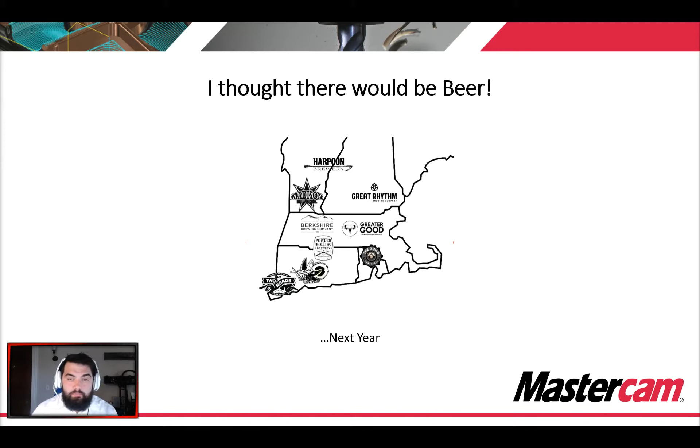A couple of things, some highlights that I'm going to be going over: machining chamfered holes based on just the width and depth of the hole, machining with a customizable multi-segment drill cycle, and the blend toolpath got improved. These are all things I'm going to cover today.

Not in my presentation, but some other highlights of 2021: the UV direction on surfaces can now be changed, which is a game changer for the Flowline toolpath. Also, machining with the new 3+2 automatic roughing toolpath, that's huge. And then machining custom thread forms - those are all things you can see in our other rollouts, other webinars.

Other things about me: I was a machinist before working at MACDAC, running primarily mill turn machines. I've been at MACDAC now 3.5 years.

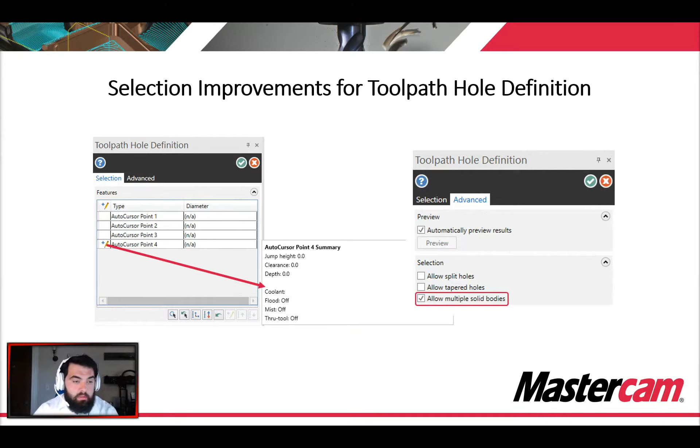So some general mill enhancements: selection improvement for toolpath hole definition. The toolpath hole definition function panel includes two enhancements. On the selection tab, over to the left here, a summary of all the edited change at point parameters are now conveniently displayed on a tooltip in the features list. And then on the advanced tab over to the right, we now have the option to allow multiple solid bodies. So we can recognize same size holes across multiple bodies with a control click onto the different solids.

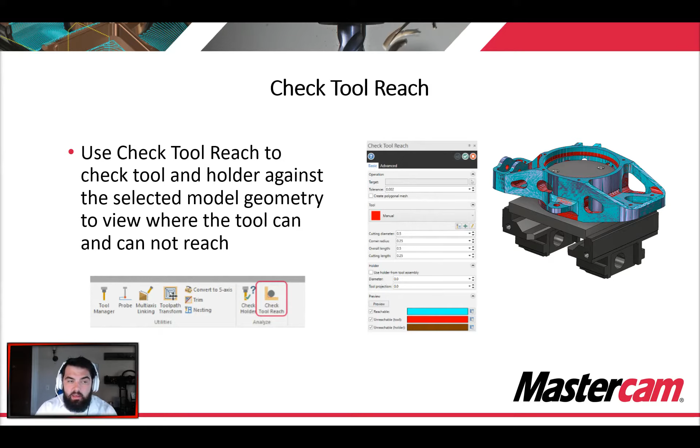Check tool reach - this is a new function as well. You can use check tool reach to check tool and holder against the selected model geometry, and to view where the tool can and can't reach. Here's a quick video on how it works.

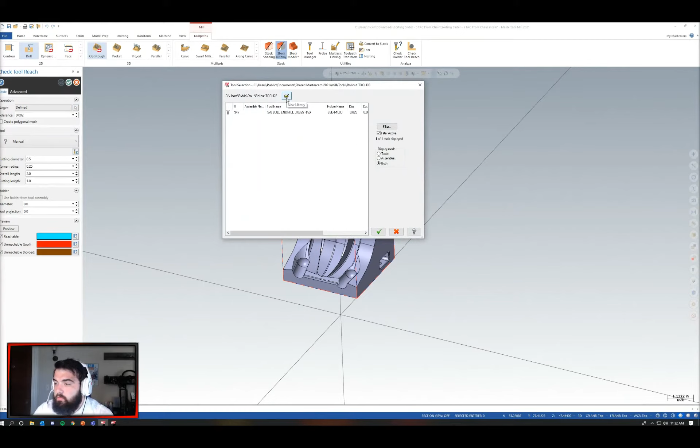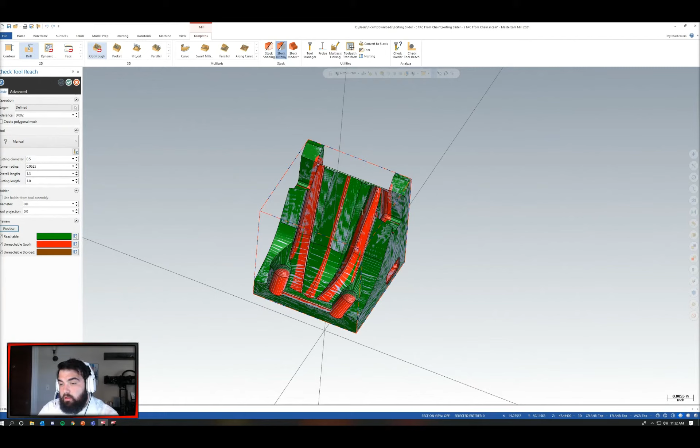So we're going to go to tool reach. Our target is going to be our solid. Now here we can go into our tool library and pick whatever tool we were thinking about using - in this case I have a bull mill. And then we can change our colors however we'd like, so I'll say green is reachable. I preview, and everything green is reachable now with that tool assembly that I gave it from my tool library. Now if I want to, I can also change the cutting diameter, just in case I have to go down a size in a tool or up, however you want to use that.

We've had just the regular check holder for a while, so this goes in the Analyze tab up here.

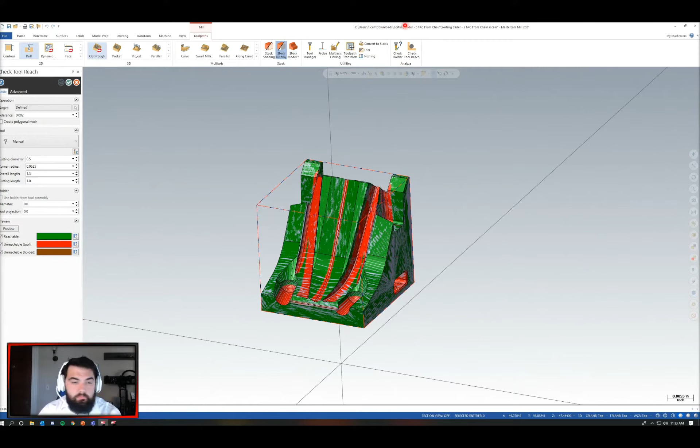So some 2D mill enhancements: skip pockets based on tool diameter or pocket size. This is available in 2D dynamic mill and dynamic OptiRough toolpaths, and there's also an option to now skip all pockets. Smaller than allows you to skip pockets based on your entered tool diameter or the pocket's size. Skip all, pretty self-explanatory - you can skip all the pockets.

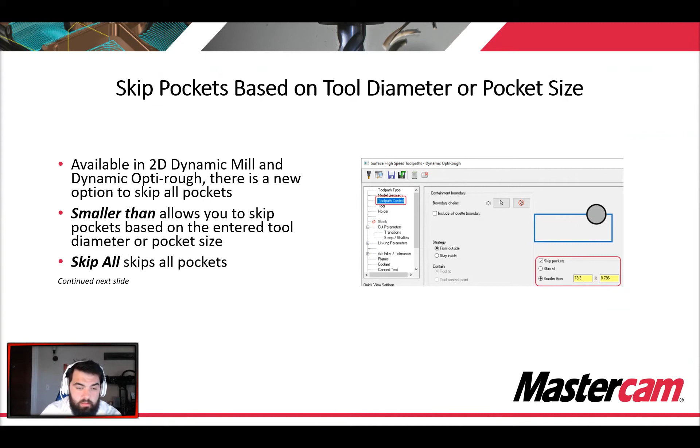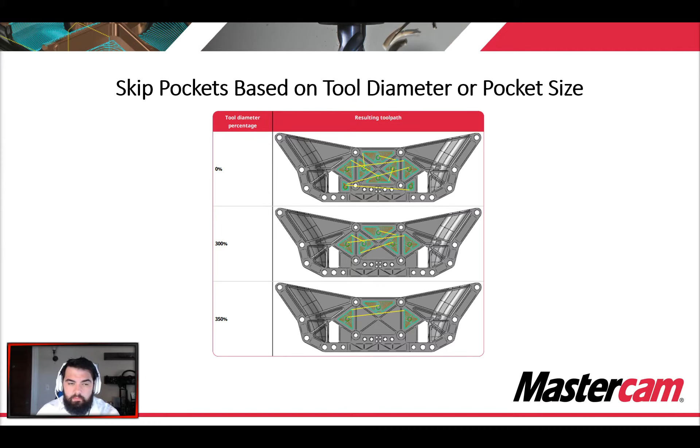This diagram shows the tool diameter percentage and then what the resulting toolpath is going to look like. From top to bottom, the tool diameter being 0, that's going to hit every pocket. At 300%, that's going to skip just that center pocket. And at 350%, it's going to skip all 3 of those center pockets. This is a function you may have seen in some of the multi-axis toolpaths, and now they are trickling down to the 2D and 3D toolpaths as well.

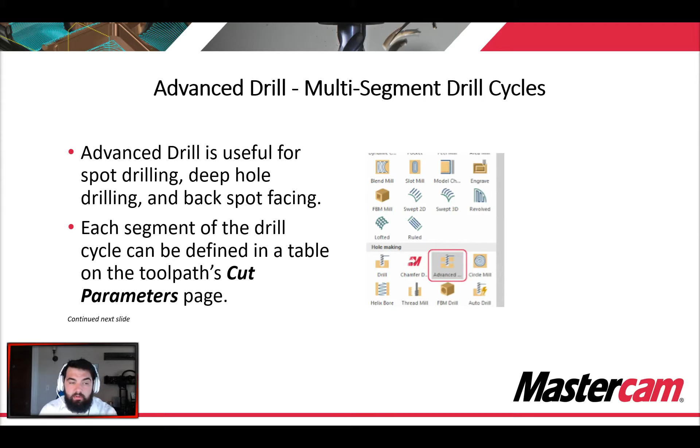Advanced drill is a new drilling toolpath. It's not replacing the regular drill, this is just adding to it. Advanced drill is useful for spot drilling, deep hole drilling, and back spot facing. Each segment of the drill cycle can now be defined in a table on the toolpath cut parameters page.

So what can you do with it? You can customize any or all of the following options. You can define individual pecks within the segment, including retracts to simulate a chip break cycle. You can set the feed rate or choose rapid motion. You can change the spindle speed. You can turn coolant on and off. You can add manual entry comments or code, and then you can also change your tool axis, whether it's 3, 4, or 5 axis output.

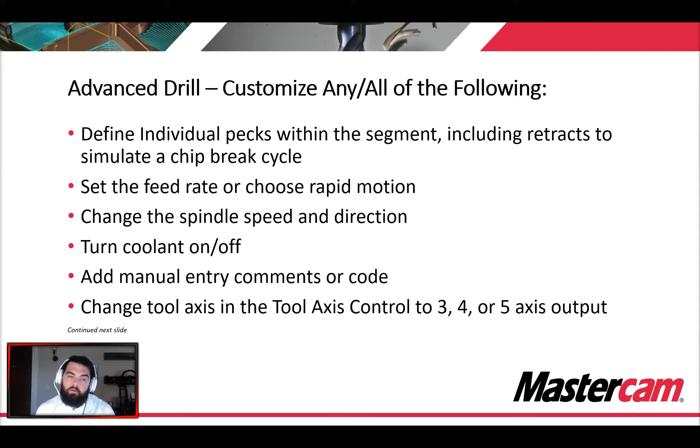So this is what the screen is going to look like. Up here we have our depth, and these fields are kind of like our machining selection fields in the 3D toolpaths, where you can double click in here and enter a value. You can also right click in that field and go back to your display window, and reference tool geometry or reference heights, things like that. So we have our depth, our feed rate, our spindle speed, RPM, our coolant, and our dwell time.

Down here is where we can enter a comment or a code at each segment. And over here, tool axis control, just like in 2020, we can change it to 3, 4, or 5 axis output, and then use say a line or a different plane, and that will give us rotation. Just a note, you do need the multi-axis drill add-on to be able to use the 4th and 5th axis options in that tool axis control. If you don't have that, you can just use your planes manager and set it up that way. That way it will still work just the same as it always has.

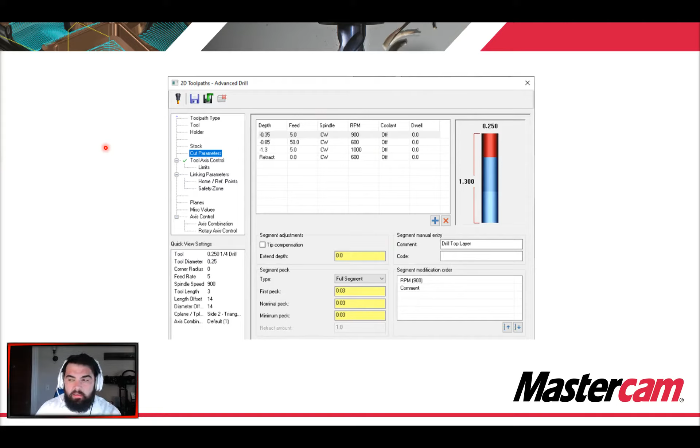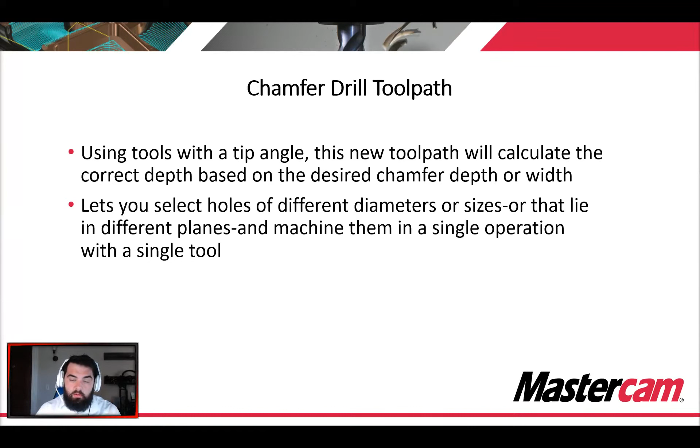Chamfer drill toolpath. This is another new toolpath that they've added in 2021. Using any tool with a tip angle, it will calculate the correct depth based on the desired chamfer depth or width. It will also let you select different holes on different planes, and it will machine those in one single operation. It's easier to show you than tell you here.

So I'll run this. What I'm doing first here is I'm going to put 2 different size chamfers on 2 of these same holes. That first hole, I put a 30 thou chamfer on it. This one is 15 thou.

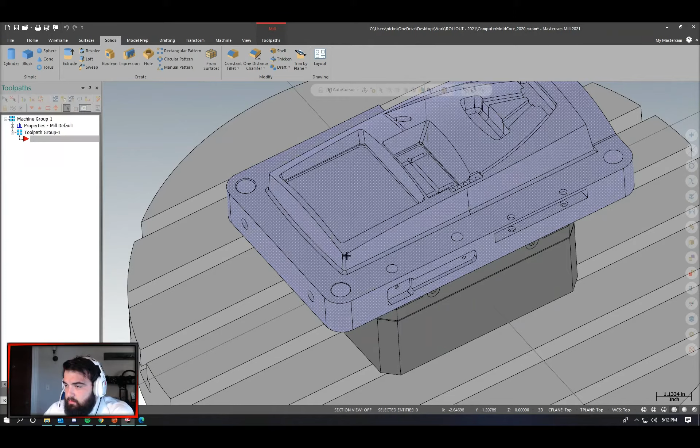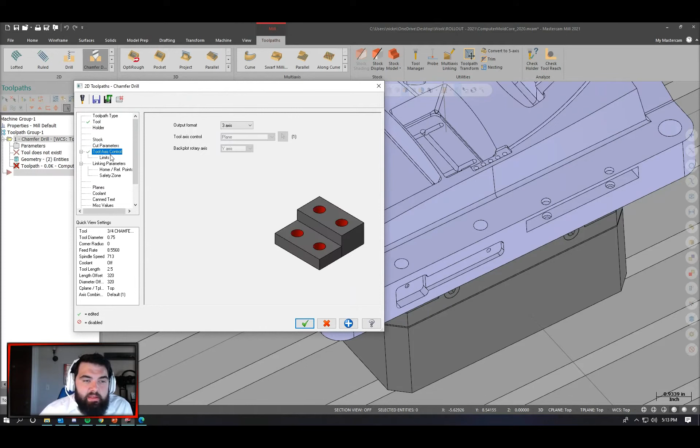Now I'm going to select each hole. I'm going to select a chamfer mill. I'm going to leave depth at 0 since I already selected the bottom of the chamfer. And then in here, I'm just going to go back to the display window and hit the top of the stock.

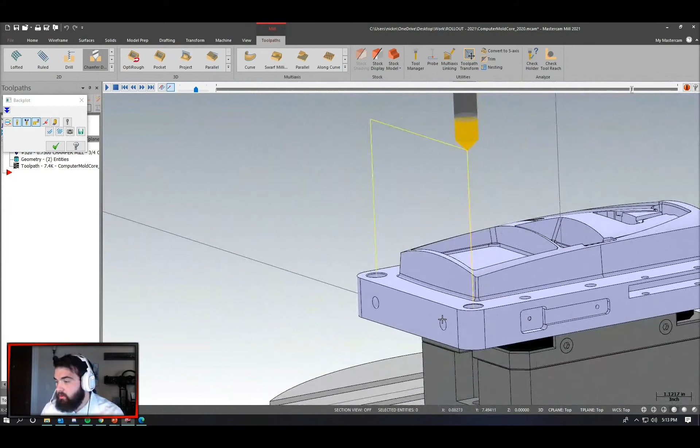So you don't need to model the chamfers like I did. I did it just so we can see, even though there's 2 different chamfer widths there, the toolpath will auto-calculate our Z depth for each one. And to prove it even further, I posted the code out so we can take a look at the Z depths. So our first one is a feed move to Z 2.758, and then our second one is a Z move to 2.773. Pretty cool for a 2D operation to do that.

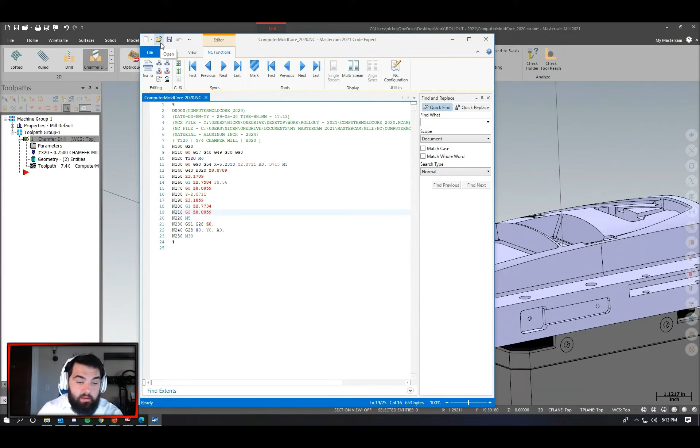Pre-machining corners for dynamic mill toolpath. Corner pre-treatment has been added to the dynamic mill toolpath. What that will do is reduce the amount of thin wall islands created when machining. I see it all the time, we'll be running a dynamic mill, and just the outside almost triangular sections don't get hit. So corner pre-treatment is the solution there.

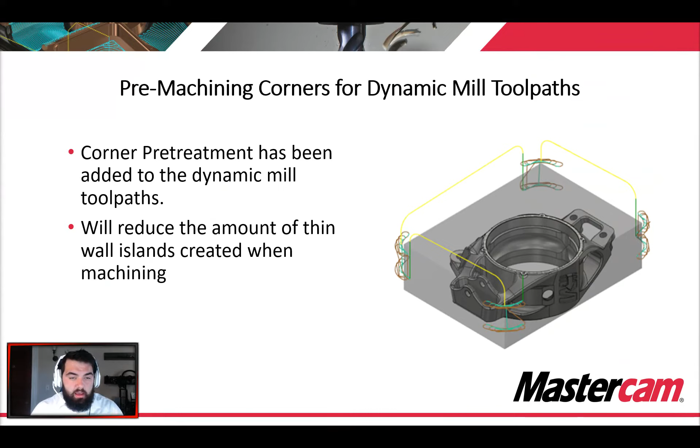Swapping lead-in and lead-out parameters. This is a new option added in the lead-in, lead-out page. It lets you swap the parameter values for the entry and exit section without losing your information. What that means is that when I put in say a length here and a radius and a different one here, I can just switch between the 2. I don't have to copy back and forth and overwrite what I have.

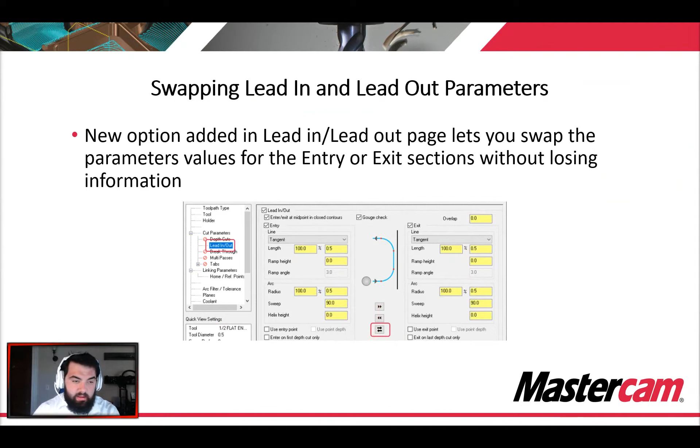Arc fit linking and feed move override. The Arc fit maximum radius option attempts to fit 90-degree arc moves into rapid and clearance moves. Then the output feed move option outputs the rapid move as a feed move.

This diagram does a good job showing what that means. On the left, both options are off—that's just a normal retract and reposition move, yellow is rapid. When you turn on both options, now you get that 90-degree arc right here, and this is also all done in a feed motion, where you could set that feed rate. This is pretty cool—I'm excited to see how this looks on the machine and how smooth that's going to look.

That's a cool one I'm excited to check out.

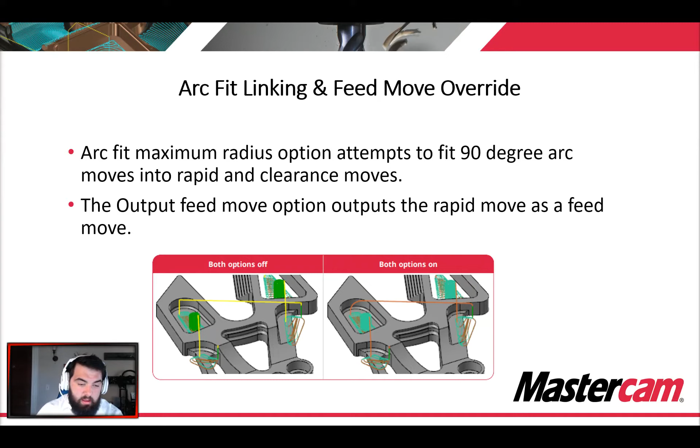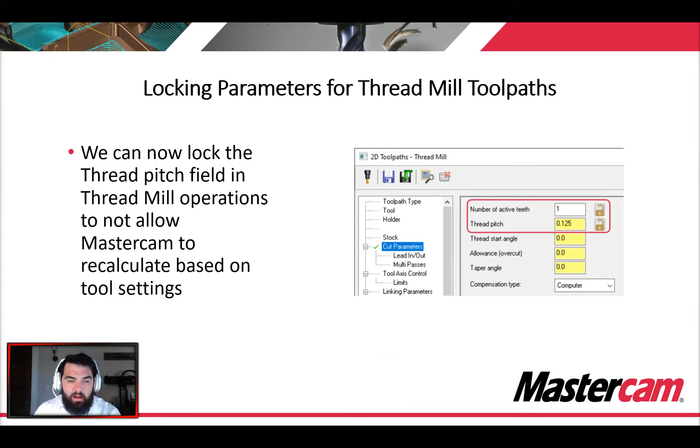Locking parameters for thread mill toolpaths. I've had this question before, where if we want to overwrite the thread pitch in a thread mill, we can't do it because Mastercam wants to auto calculate everything. So now we can lock the thread pitch field in thread mill operations to not allow Mastercam to recalculate anything based on the tool setting. That's pretty nice—that's one I know I've heard from a customer or two, and that's a neat upgrade.

3D mill enhancements. A big one in 2021 has been 3D Blend. This is a toolpath we really use all the time, so they've really put some work into it. Over the past two years, actually 2020, they did a lot of work to it as well.

A couple new options: equidistant passes, 3D option added to the cut parameters page. What that will do is Mastercam will create the pass equidistant in 3D areas, adding cuts in steep areas. So where 3D Blend might have failed before in some steeper areas, that should be cleared up now.

Also, we're able to set the number of cutting passes instead of step over or scallop height, so now we have a third option for cutting pass control. This diagram here, with number of passes off, that's just going to do, say, a 15-, 25-thousandth step over, whatever it might be programmed to. With number of passes set to 10, it will do 10 equidistant passes down the part.

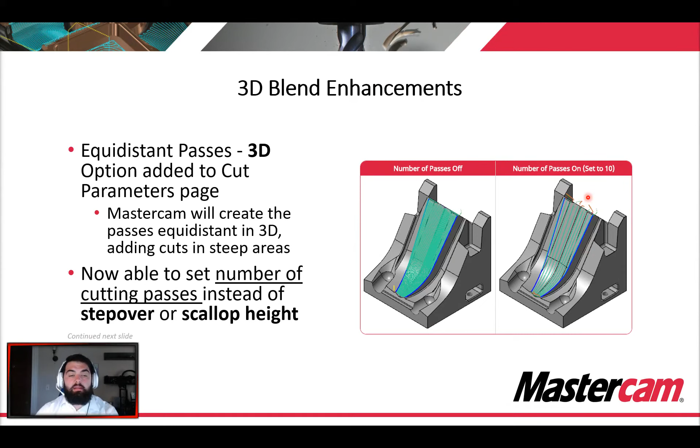More on 3D Blend. Confining curves to tooltip or contact point: when we do a containment boundary, the tool tip confines the tool center inside the selected curves, or the tool contact point will let the tool contact point be inside the curves, but the tool itself can go outside the curves. So a nice little option.

Hopefully I made that clear—tool tip on the left and then tool contact point on the right, and that's both under the 3D Blend toolpath.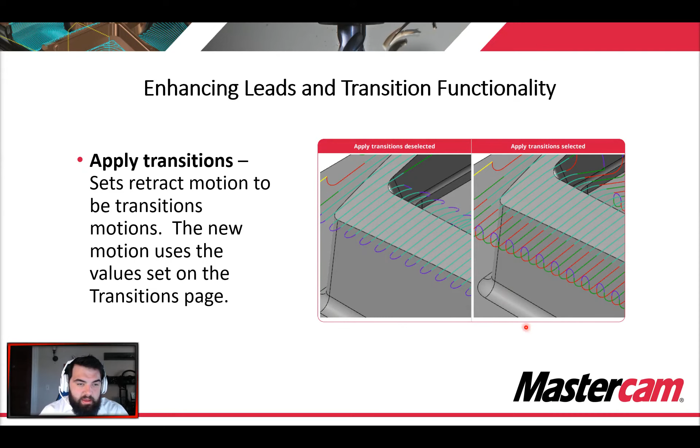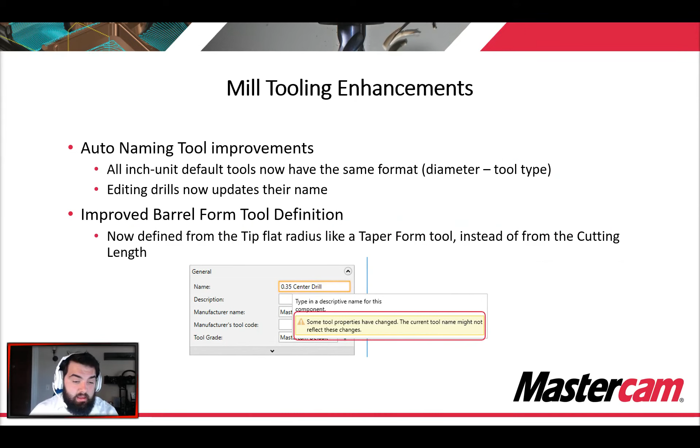And then also additional feedback when naming tools, that's going to be this down here. I like seeing this kind of stuff where we get more information through the menus as we're using the software. For a long time, if the software doesn't like something you're doing, it doesn't really tell you why or what to change, and it looks like that's starting to change here. Once we start messing around with our tool settings, it looks like it's going to give us a little bit of information on what we need to do or what we're missing. So that's a step in the right direction, I think.

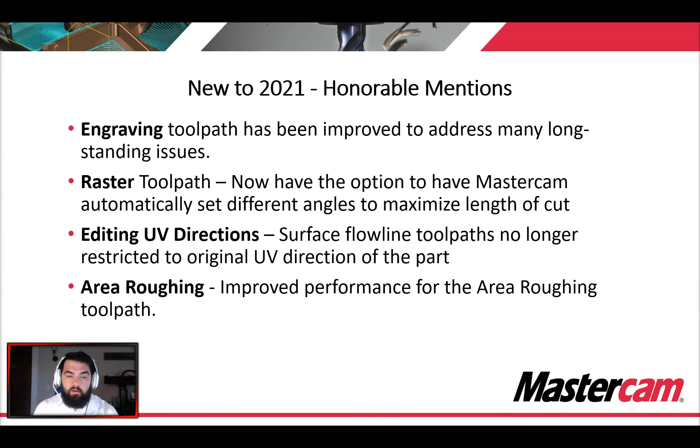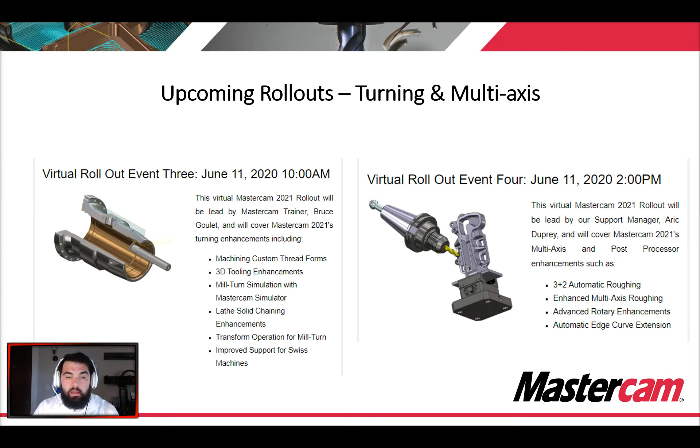All right, so upcoming rollouts. That's going to kind of conclude the milling section here. Hopefully you guys got a lot out of it. Coming up, we have June 11th at 10 a.m., Bruce is going to be doing turning. And then June 11th at 2 o'clock, Aric's going to be doing the multi-axis and post rollout.